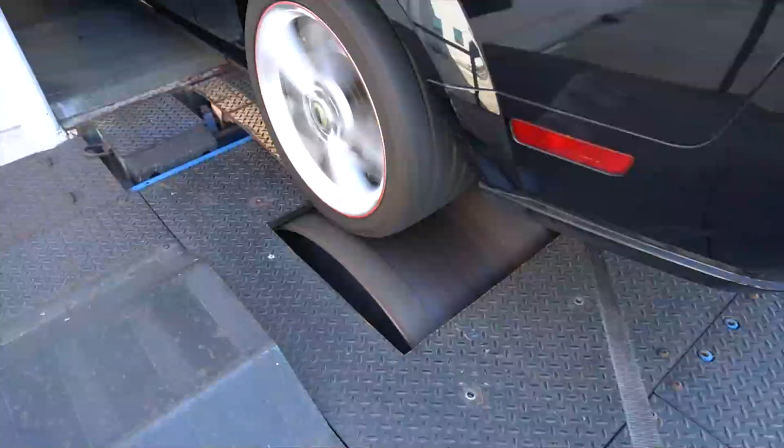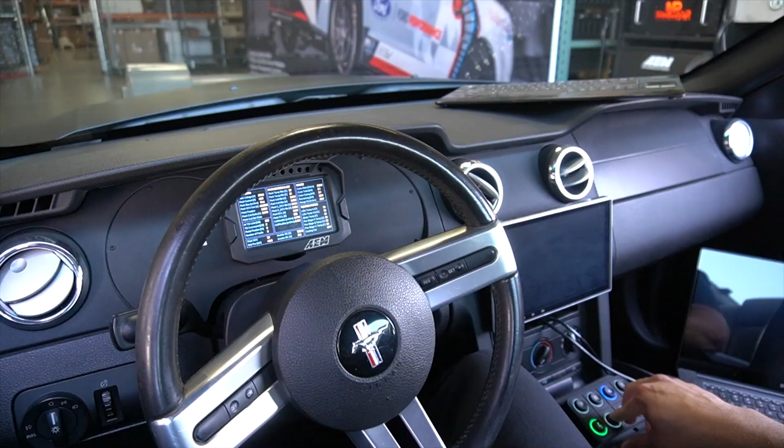All right, so we did our max power, all the beans, big number runs, and now just to demonstrate what the performance levels will do, we're gonna switch down to performance level 2. So I'm gonna hit that button. Performance level 1, all the beans, 460 Newton meters. And performance level 2, 400 Newton meters.

All right, now we're gonna go performance level 3, take it down another notch. Torque limit, 350 Newton meters.

So we get it ready for power level 4. This is grandma mode, no offense to any grandmas. Maybe we'll call it turtle mode, no offense to any turtles.

And that's about it. I'll tell you what, as a tuner, I really appreciate how clean and quiet being in this car is. I used to tune race cars and all kinds of stuff, and I would just stink like exhaust and get headaches and be nauseous all the time. EV tuning is like worlds better than old ICE tuning, I'll tell you that. And my ears appreciate it too, it's quite a bit quieter.

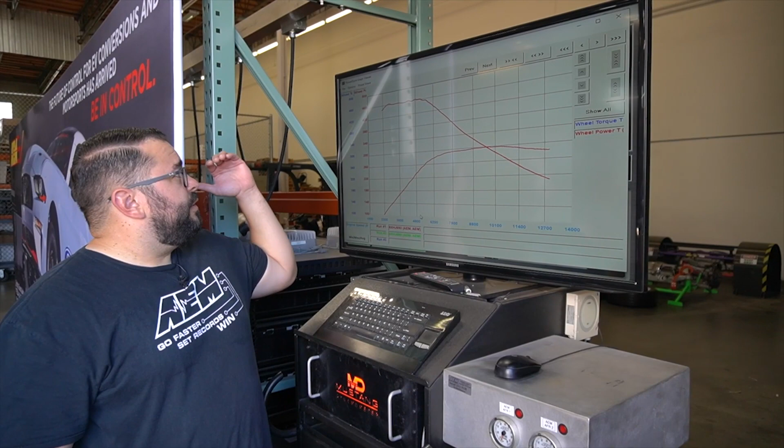The Tesla drive unit has a 9.73 to 1 reduction gear ratio, so almost a factor of 10. So we're making 460 Newton meters of torque at the rotor, times 10 is like 4,600 Newton meters of axle torque that you're measuring at the wheel.

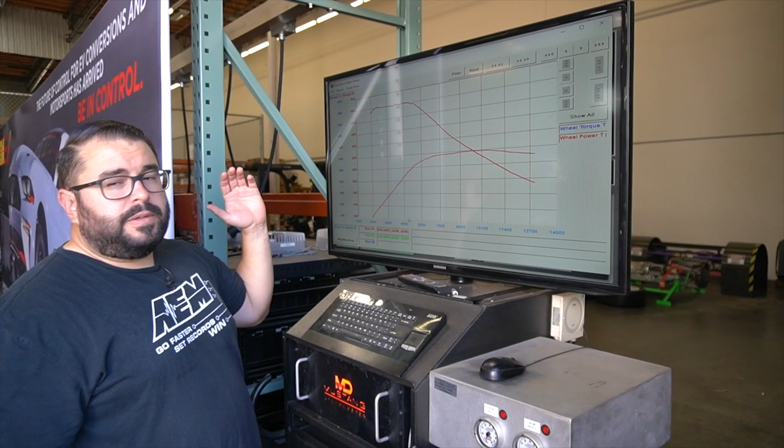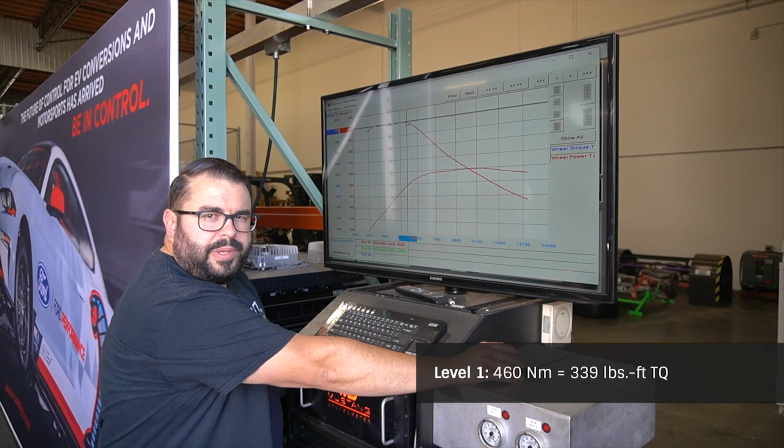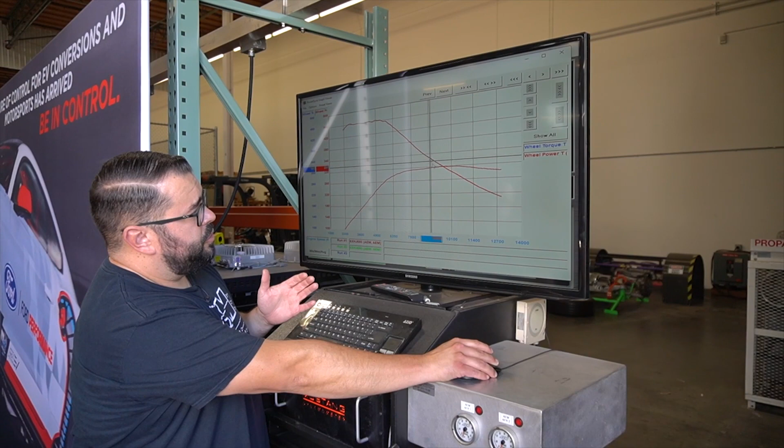All right, so performance level 1, max power, all the beans, foot to the floor, as fast as we can go. We're making a very consistent 460 Newton meters of torque out to about 5,500 RPM. At this point, this is called your field weakening point, so in order to maintain and make as much power as we can, we have to start dropping the torque curve off. So the torque curve is starting to decrease. Our power curve, we're making right at just a tad under 300 kilowatts of horsepower, plenty of go.

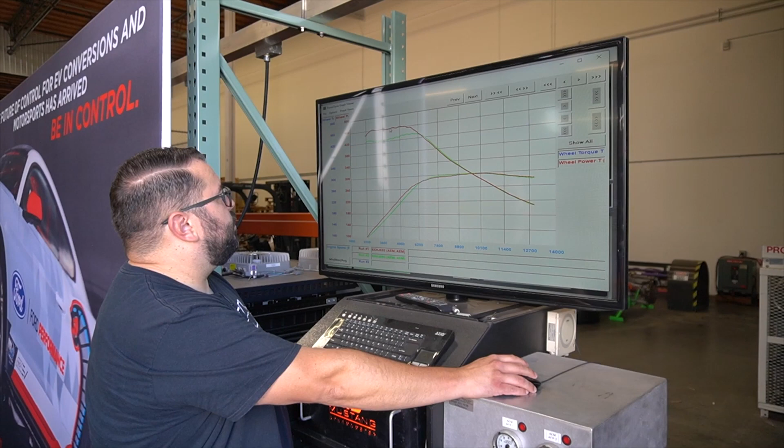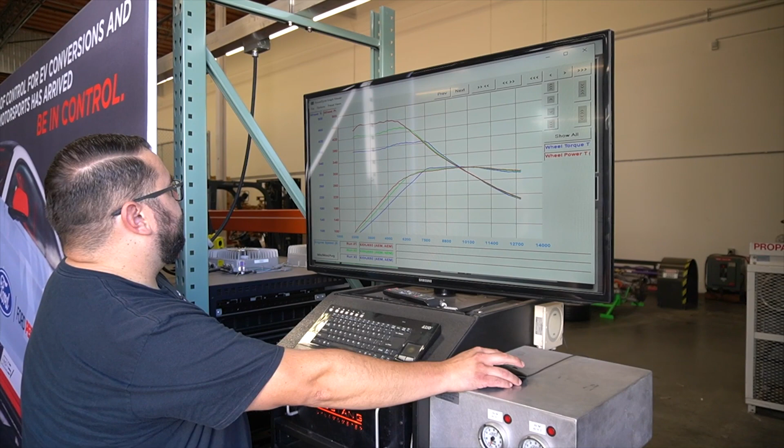So performance level 2, we're asking for 450, we get about 460, not bad. We're gonna drop it down about 50 Newton meters, not quite, 424, 425. It's nice when you get more than you ask for. Next performance level, we're gonna drop it down to 350, which is getting us more like 380, still not a bad problem to have. And then finally, our last performance level, down to 300, our valet mode.

And actually this is user configurable. You can tune it to however you want. You can do even bigger steps, go 100 Newton meter, 200, 300, 400, whatever you want. Point being, you've got the functionality and ability to do such a thing when a lot of other systems don't give you that capability whatsoever.

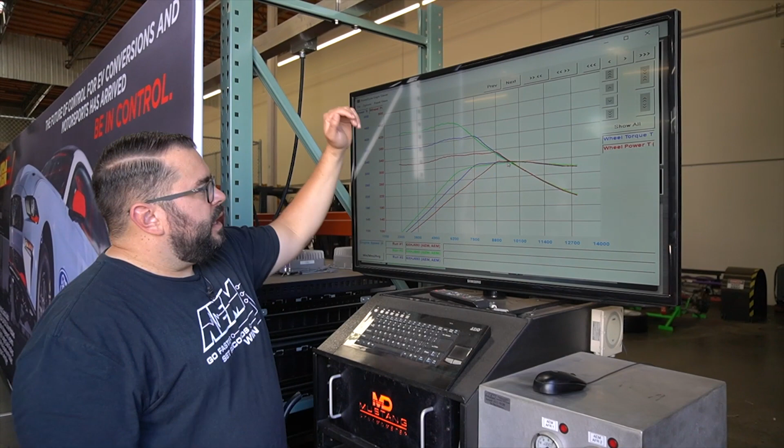So as Sound Guy just mentioned, he's looked at these torque curves and noticed that while the torque curves are actually decreasing, and they are, the peak power down here at about 9,000 RPM actually stays the same. So they all wind up making the same amount of power because of the way the electric motor trades off torque for power, they eventually cross at about 9,000. We might be decreasing our lower RPM torque and acceleration, but our peak power actually winds up being the same.

So kind of an interesting tidbit of information there. AEM EV would be totally remiss if we didn't really spell out the full truth and everything that goes into a performance electric motor and an inverter.

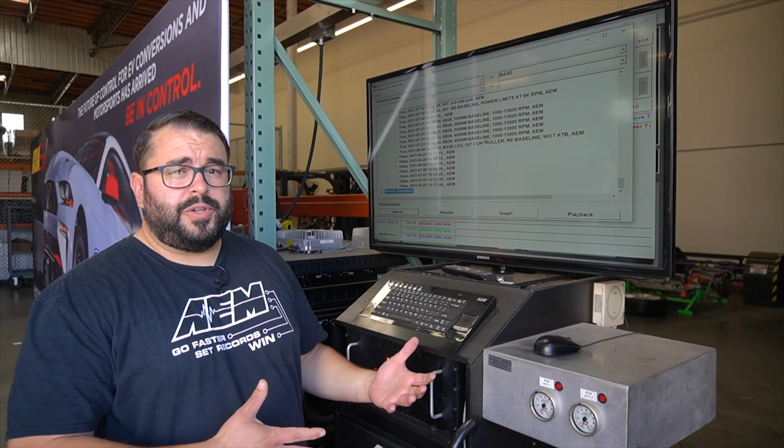So we've taken the time to strip out all the limitations and de-rates and things that make the Tesla drive unit limited in its performance. We've taken a lot away and we've fully unleashed it to its max possible power output, best we can do. That's one half of the equation.

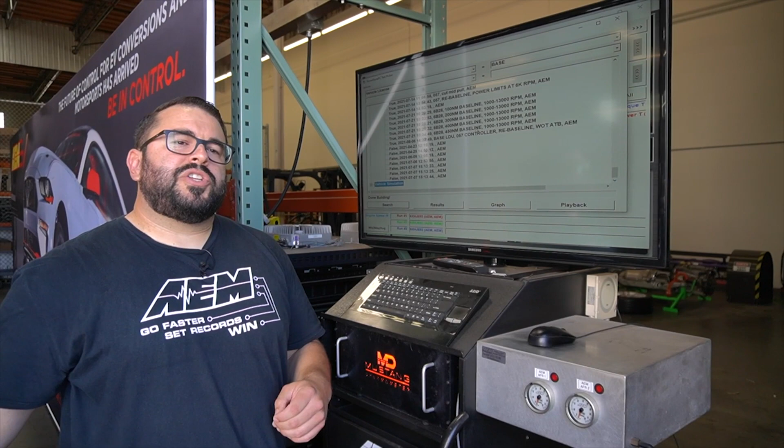The other half of the equation is the battery. When we run these motors and these drive units, you're not making a complete or fair comparison without at least acknowledging what kind of battery you're using. We touched briefly on the fact that the car actually has batteries out of a hybrid minivan. Another common battery that someone might choose to use is the battery out of a Model S itself.

The battery type in a full electric vehicle versus a hybrid, they're actually quite a bit different. The hybrid battery is designed to drop a lot of current, move a lot of current and a lot of power very quickly, whereas an electric vehicle battery is more designed to provide a steady, consistent power flow and not necessarily give you a big power punch. Our car has hybrid batteries.

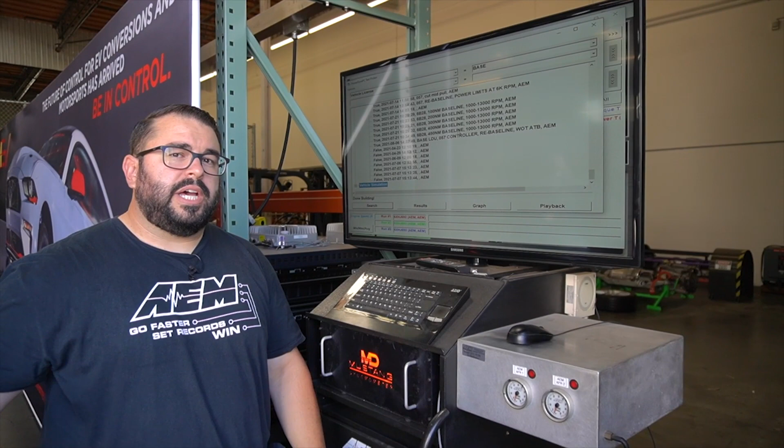They like to deliver a lot of current and a lot of power very quickly, so we are able to make a lot of power with our base drive unit. We've run a Model S P85 car on this dyno before. While you do get nearly 600 newton meters of torque, the torque curve very quickly drops off.

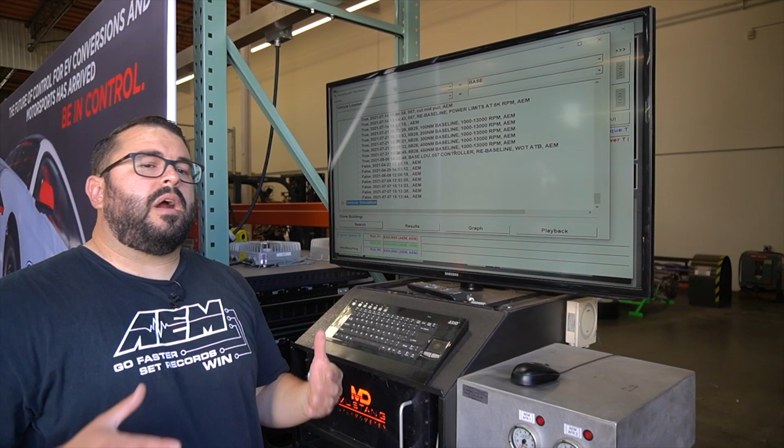The reason being is that the battery just doesn't have the power and performance to really push that power curve out as long and as far as it can. So what we discovered was that our base unit, combined with these hybrid batteries, actually makes more power than a Model S P85 Plus, which blows our minds. It's wild. But anyway, let's take a look at the numbers and show what that looks like.

So the blue curve is a Tesla Model S P85 Plus. You'll see that the torque curve peaks just under 600 newton meters, but pretty quickly starts dropping off. These other two torque curves here are from our base unit using the AEM EV inverter control board, and you'll notice they have two slightly different trends.

The first trace is our green trace, and that is our dyno development equipment that we have. Unfortunately we haven't been able to show it, it's kind of top secret stuff, so we've kept that stashed away. But with that drive unit and the power supply we supply to it on our dyno, we're able to make quite a bit of power. It really pushes the power curve and the field weakening point out quite a bit.

The red curve represents the car and what torque and power we're able to make with it and its battery. You'll notice we still make the same peak torque, that's all based on current. But what happens is as the battery starts to drop off in how much power it can supply, the field weakening point starts to happen a little sooner, and as the torque curve drops off, it's actually dropping below the torque curve of our base unit.

Our base unit with our hybrid batteries makes significantly more power. So while the Tesla will give you a good kick in the pants right off the line, all the fun from that torque curve is dropping off right away. It's just slowing down, slowing down, slowing down.

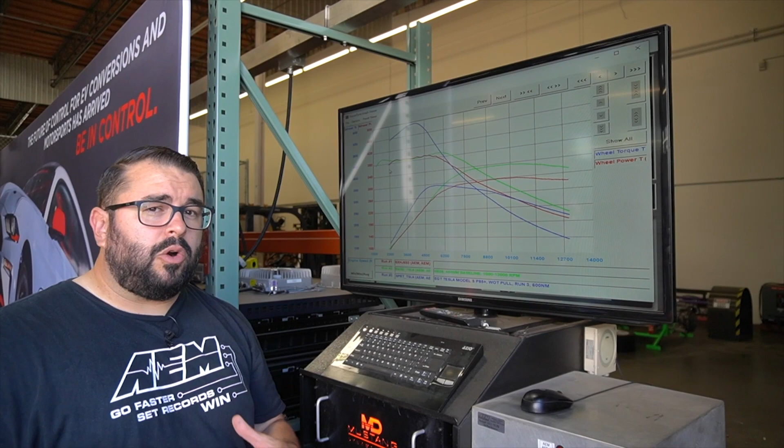What this tells you is that you're not quite limited in the drive unit itself. A lot of people push right towards a performance drive unit, but if you've got the battery behind it to really give it the current and power it needs, you get a shocking amount of power out of a base unit. As you're planning your EV build, take serious consideration into your battery.

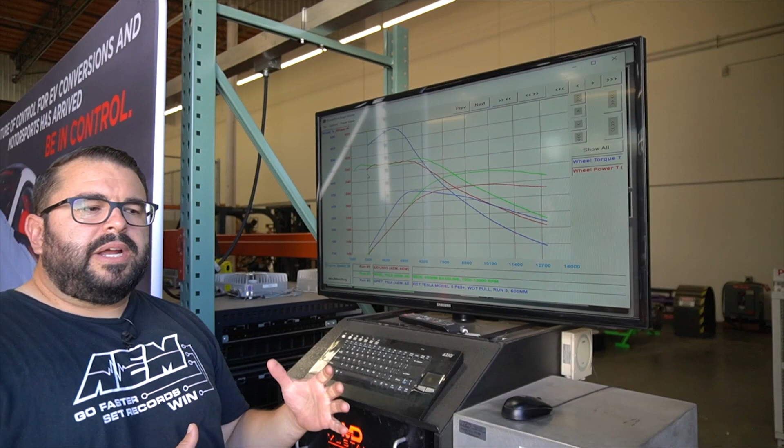Hybrid batteries work great, they're good at making a lot of power. EV batteries, depending on what your goals are—if something like longer life is more important to you, then perhaps an EV battery is in your future. We're a little more performance minded.

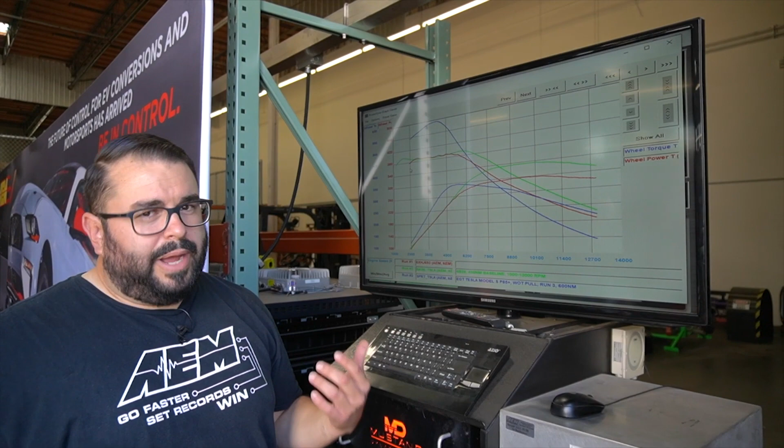We want to make that big number, so we go with hybrid batteries. Next step for us, we're going to get some more cars in here, put them on the dyno, see what kind of numbers they put down, and then the final step is to take them to the drag strip and run them down the quarter mile.

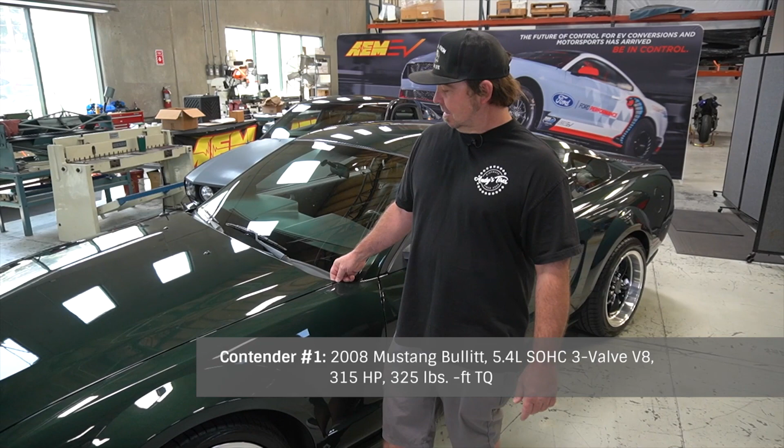Hey, how you doing? My name's Justin. I got a 2008 Ford Mustang Bullitt. It's got about 73,000 miles on it. Pretty much came from the factory just like this with 315 horsepower. Has a factory Ford Performance cold air intake, only came in the 5-speed. I've left it completely stock minus a recent muffler delete, and then I put some KW coilovers on it.

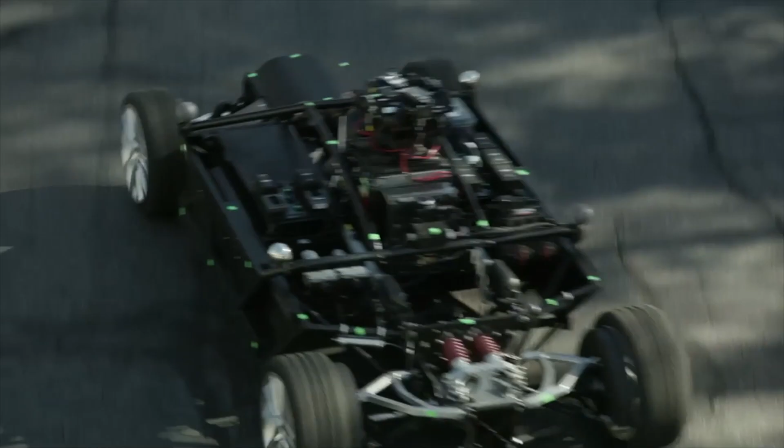I do have a little bit of a background with EV. I helped on the build of the Mill Blackbird, which is a CG car that they use in film production, mostly for commercials, where we can basically make the car any car we want just by changing the wheels, setting the wheelbase, setting the track width, and then they CG a body onto it, and it's an EV car. Oh, it's gonna most likely get its ass kicked.

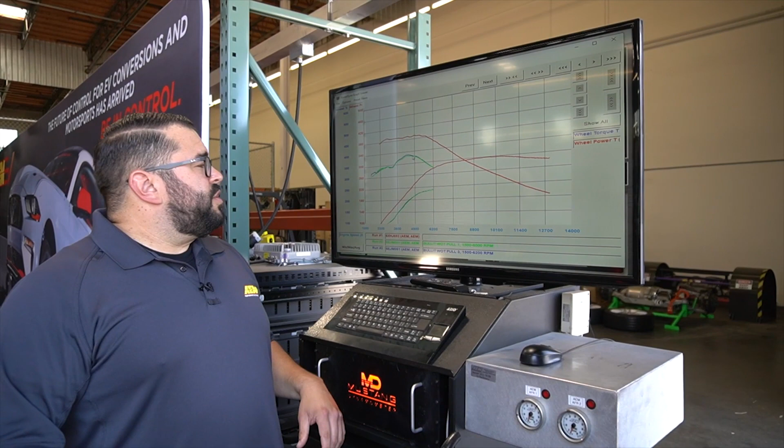We've run the Mustang GT, the Bullitt car on the dyno. The first thing you'll notice in the dyno plots is that the RPM range for the Mustang is from about 1,500 RPM to a little over 6,000 RPM. At that point, you got to shift into the next higher gear and keep going. With the Tesla, it'll run up to nearly 18,000 RPM. So our range is quite a bit larger. So there's no shifts that have to occur.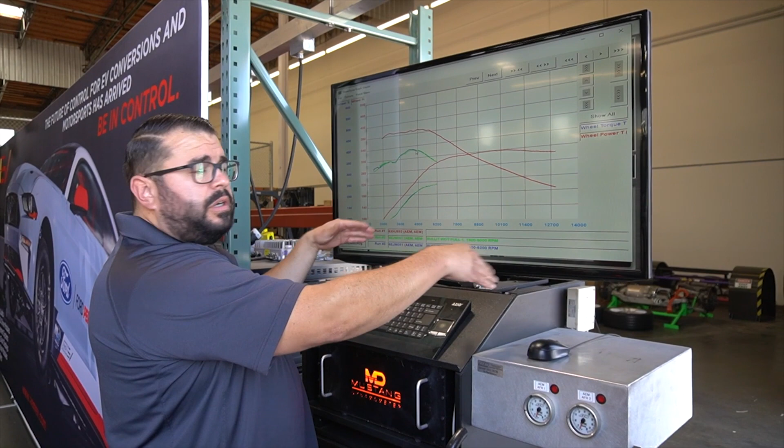There's no upshifting, no clutch, no delays between gear shifts. It's all just right there, right away, pedal down and go. The power pulls on something like a Tesla will go from basically stopped all the way to well over 100 plus miles an hour. We ran it maybe up to like 75 miles an hour in third gear. So we're able to measure the power in each gear independently. So we didn't have to run it in fourth gear direct drive. We can run it in actually any gear, synchronize the speed and run it in that particular gear, which works out really well.

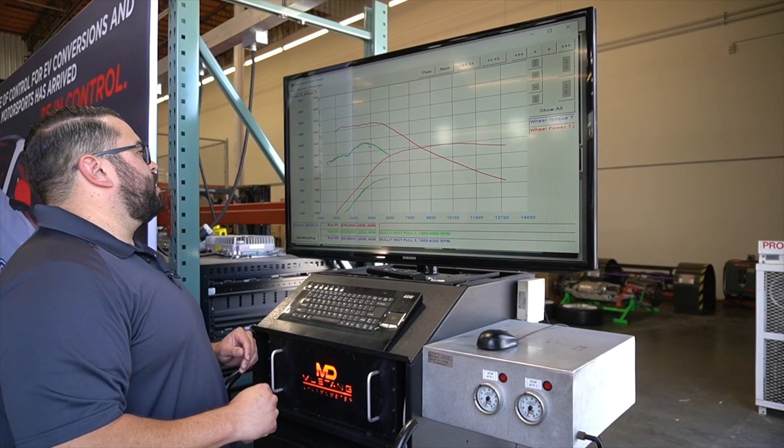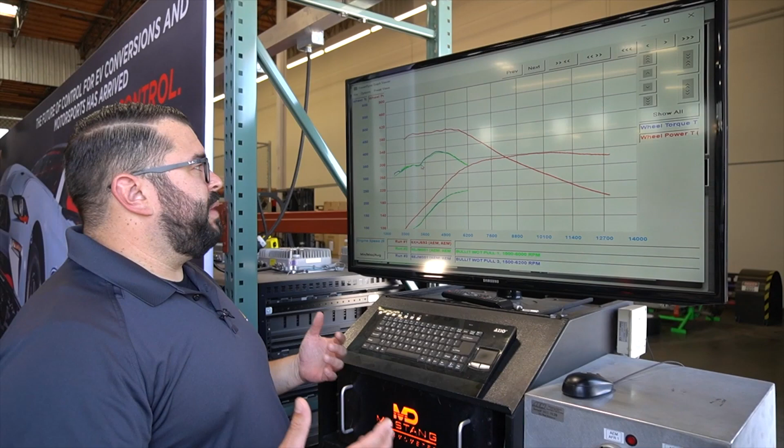Let's get down to the nitty gritty and actually talk about some of the number details here. This particular motor is what's called the mod motor 4.6 3-valve, and the 3-valve has the benefit of having a single overhead cam that actually is variable, and you can see where that variable cam kicks in, and you can see that in the torque curve.

Down here we're making let's say 330-ish Newton meters of torque, and then it looks like the cams probably start to do their thing, and it makes a peak of about 385 Newton meters. That's pretty good, that's not bad at all. And that carries out and drops off to about 325 once we get to the red line of about 6,200 RPM. Now, as far as what that equates to in power, we're making just a little over 210 kilowatts, 209, 210 kilowatts. Pretty good, considering the motor is rated for 315, figuring in about a 15% drivetrain loss. These numbers totally make sense for what they are.

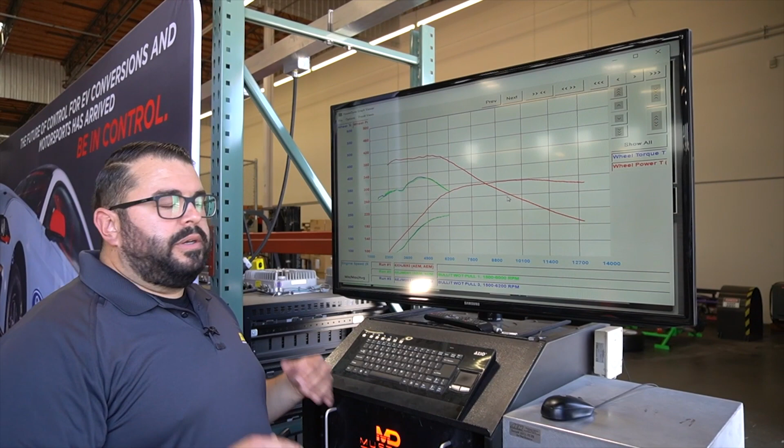Now, the thing to compare really is just the stark comparison between the power level you get with the internal combustion engine and then what you would get with something like the Tesla. Another 100 kilowatts basically of power, and I think every 100 kilowatts is 1.3, so about another 135 horsepower. The performance on an EV, on something like a Tesla large drive unit is bar none. Gear reduction ratios you get, the torque output, I mean, it's a big honking motor and a big drive unit that just makes a ton of torque and has a single gear that revs all the way to almost 18,000 RPM. So it's just, there's no comparison. They're night and day different, and you can see that in the dyno plot.

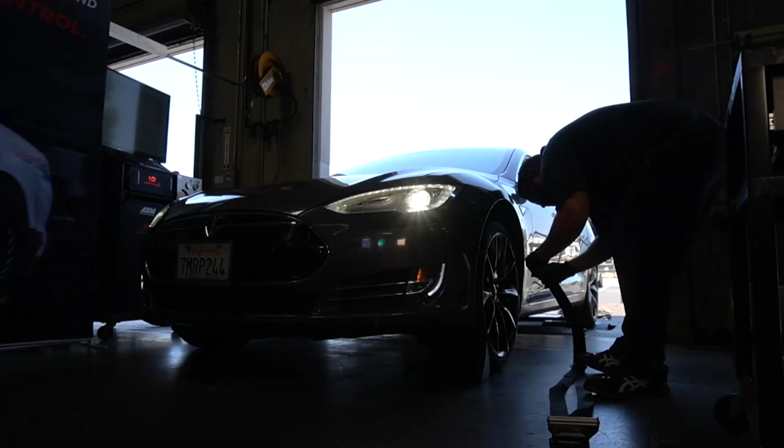The next car up that we're gonna run is actually, we're gonna pit the Tesla powered, Tesla battery, Tesla Sport drive unit from a Model S P car to our Mustang. We've just finished running the Model S P85 Plus car, and this has got rear-wheel drive, two-wheel drive only, large drive unit, sport version, the performance version. Right off the bat, let's look at the torque curve. So large drive unit has been published to make about 600 Newton meters of rotor torque.

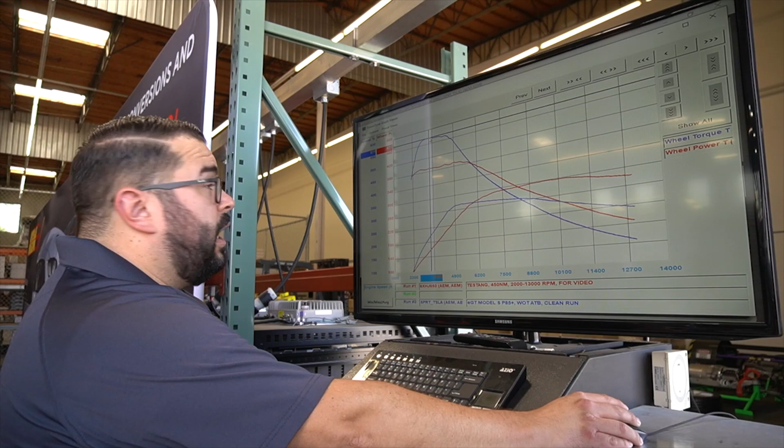We'll be generous and give it the peak. It made about 570, 571 newton meters of torque. That's great, that's really good. And actually driving this car around, it throws you into the seat.

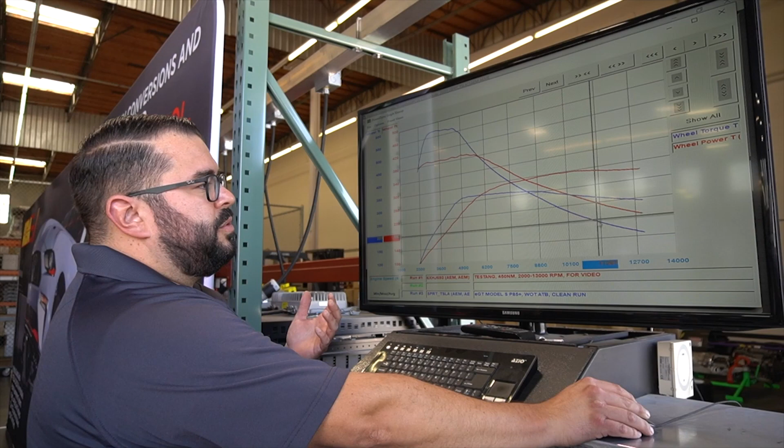It really is instantaneous, it's awesome. But the thing we want to see, granted it does make 550, 570 plus newton meters of torque, you can't ignore the trend, the actual torque characteristic, that it pretty quickly starts to drop off. You get that really first quick acceleration, and then you feel the fun starting to end, it doesn't pull as hard as long. So the torque curve drops off and continues to drop off, and what that's really indicative of is the battery chemistry. You do get the kick in the pants right off the bat, that's great, but the bottleneck, the limit here, is actually the battery itself. It's not able to push out the power and current that the motor really needs to continue making as much power as possible.

So that was the torque curve. Let's look at the power curve. And here we can start to compare it to the power curve from the Testang. Because the sport unit is making more torque, the upward trend of the power curve is greater than the one on the Testang with the base LDU. So it's making more power, making it a little sooner, because it's making so much more torque. It's making like 150 newton meters more torque, which is very significant.

But because the torque curve is starting to fall off, the power curve peaks, probably about 40 miles an hour like I was saying before, and it pretty well flatlines and then starts to drop off as the motor speed continues to increase.

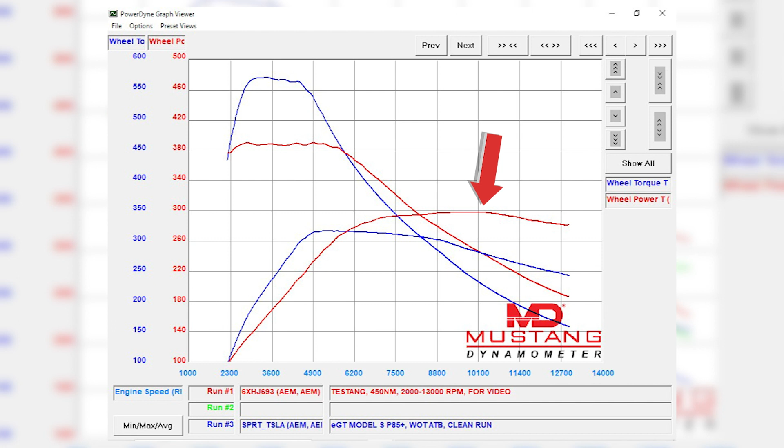So the thing to really take away from this, let's look at the power curve from the Testang with our base LDU and the AEM EV control board. Granted, our rate of power isn't as significant or as high as it is in the sport unit, but notice that it keeps going and finally peaks right at 300 kilowatts. According to our dyno, this Tesla Model S P85 Plus made about 275 kilowatts of power. We're making 25 kilowatts more power with the base large drive unit in our Testang.

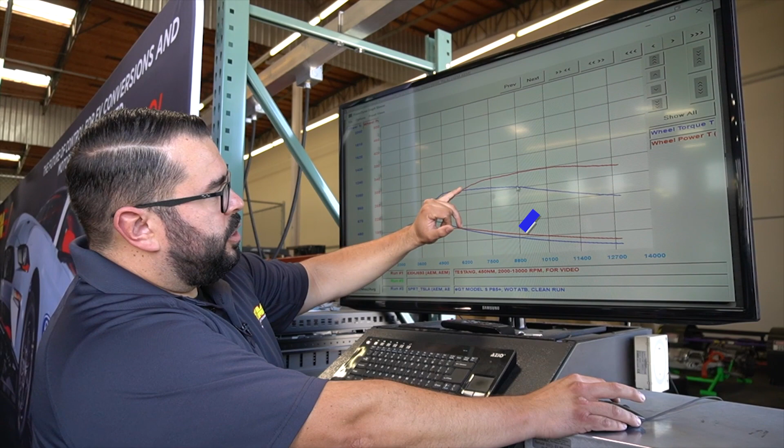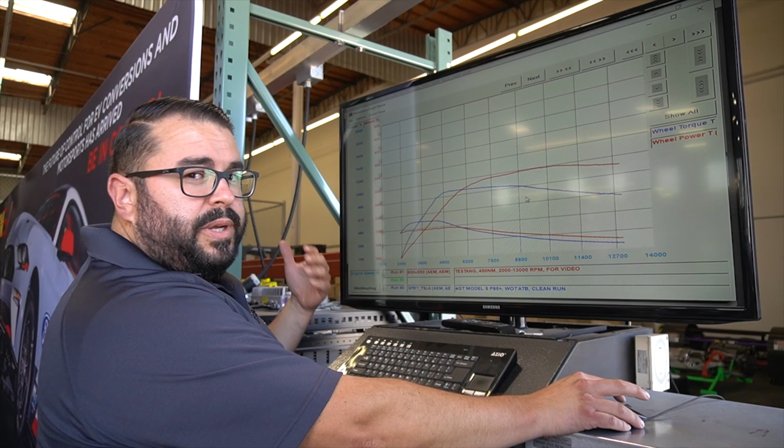That's pretty cool. And the meat and potatoes of that power curve is right here. You can see that the Tesla torque curve is trending down, and the Testang with our AEM EV control board is not trending down nearly as much as the Tesla curve. So this is torque that's continually being delivered at a higher rate as the motor continues to accelerate. The power curve is not dropping off, the car is not slowing down, the car is accelerating.

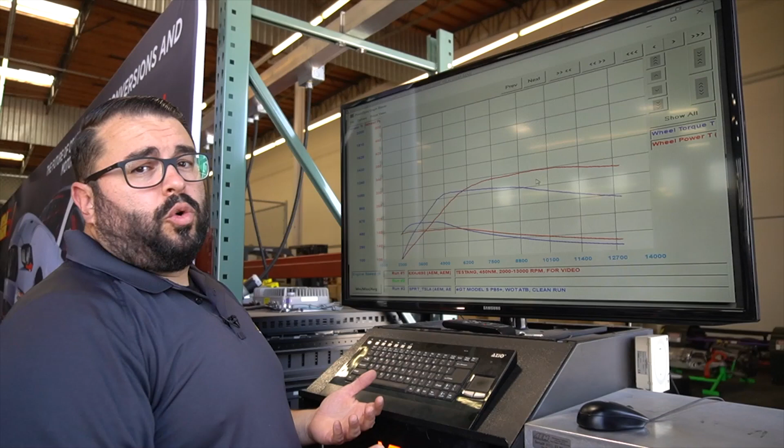You're going to see these results very dramatically, I think, in the quarter mile. My expectation is the car will probably get us in the first, I don't know, couple hundred feet. And then where this power curve continues to increase past the Tesla's power curve, the Testang is probably going to start catching up and possibly walk away from the Model S in the quarter mile.

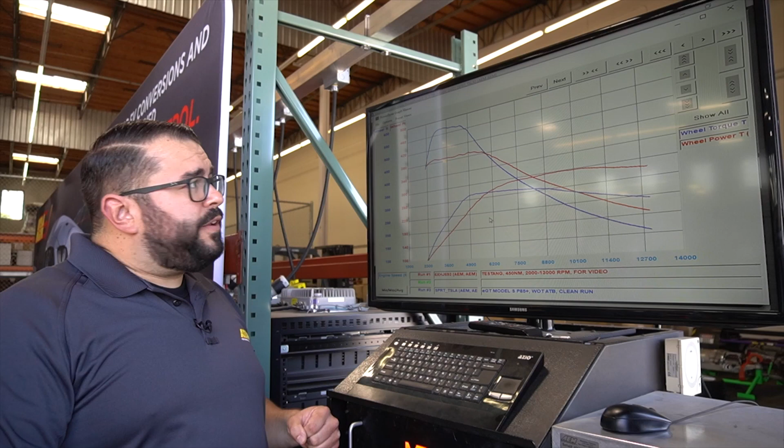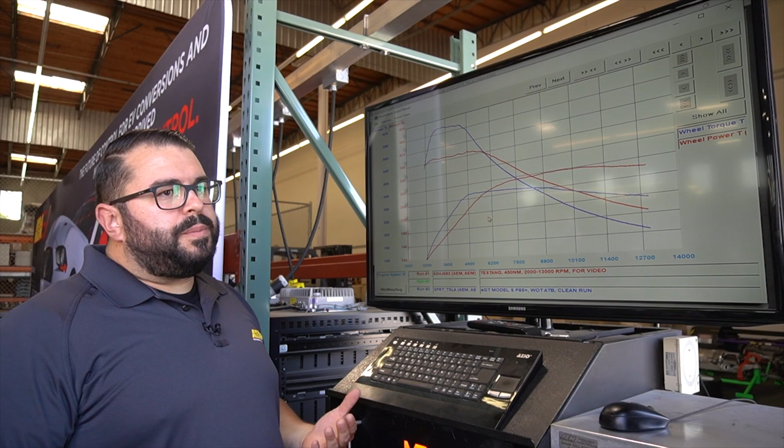If you're out there doing research and looking around, wondering what kind of battery you should pick, this data really does point you towards something like a hybrid battery, whereas something like a full electric battery serves a purpose that may not necessarily be as well suited for maximum performance.

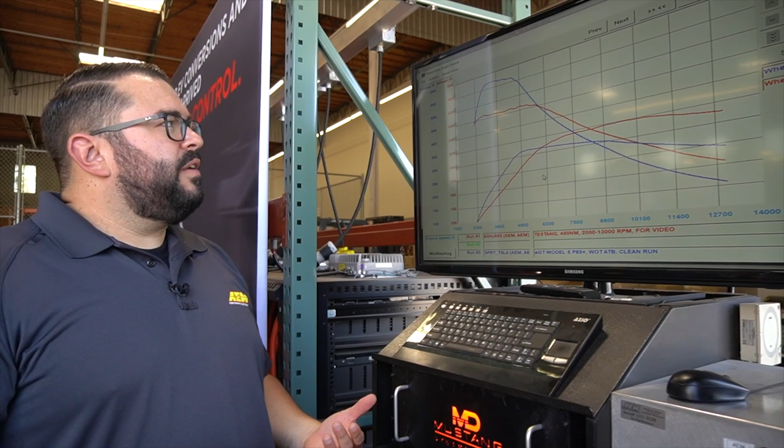So we know that best case scenario, our control board on a base drive unit makes 50 to 55 more newton meters of torque than a stock setup does. Stock Tesla is probably going to be down here at the 400 mark, and if we project that out, I'm assuming it's going to follow the same trend and start falling off, mirroring the P85 power curve or torque curve. It's going to be somewhere down underneath here, quite a bit less power, probably under 250 kilowatts. If it makes more than 250, I'll be surprised.

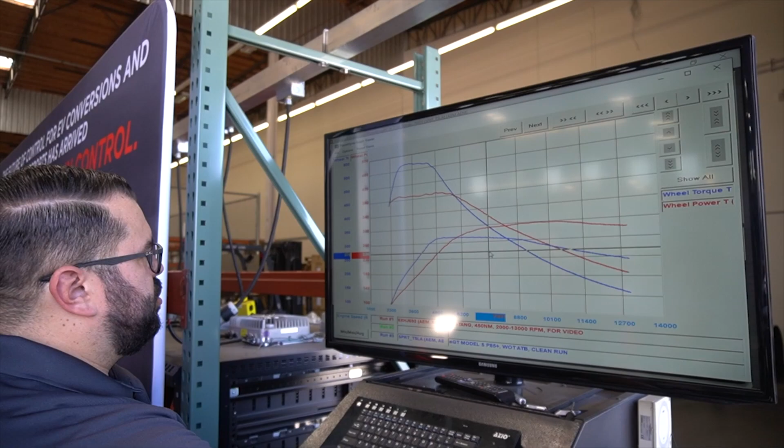So when we did all of the base LDU development, what we tested and did development on was actually a stripped down drive unit mounted in a Tesla subframe, with the drivetrain, suspension, axles, wheels, hubs, everything. That whole assembly minus a car, we made a rig for and bolted it to our dyno, and that's where we did well over 1,000 runs to collect data and characterize and tune the motor. A lot of this base data we have was from that test unit.

The one thing we haven't done is actually test a true, real, from-the-factory base Model S drive unit. It's exactly what we've been testing all along, but we're going to leave it paired with its stock Tesla battery. We want to do a true apples to apples comparison. That's what we're doing today.

We're going to lay down these numbers, do a quick analysis, and do a final comparison to really show the difference between these drive units with our control, stock control, as well as how important the battery really is in what kind of power you get out of your drive unit. Let's do some pulls and see what kind of numbers we get.

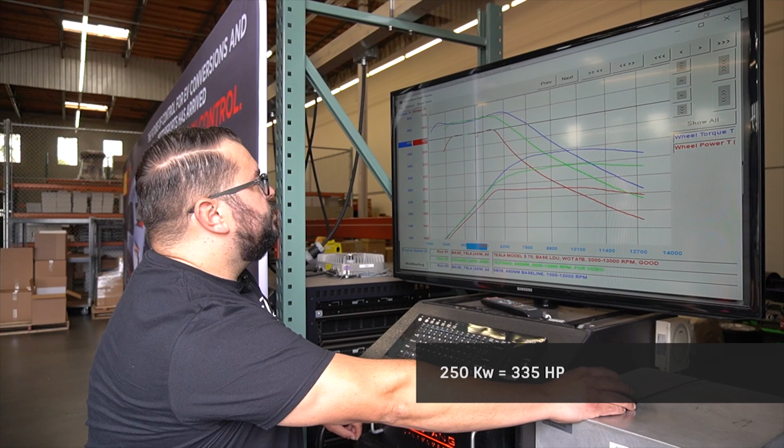So now that we're looking at the data, I said we're going to make 250, and it turns out that peak power, this red trace here on the base unit on this car, made 247 kilowatts. Right around that 250 mark. 420 newton meters of torque. We've seen that before, that's pretty standard. And just like we saw in the P85 car, it makes that torque, but it can only make it for so long, before the battery power and its voltage really starts to drop off.

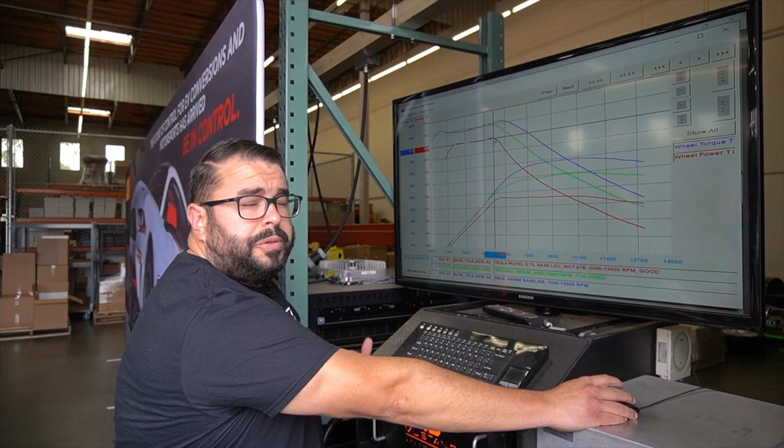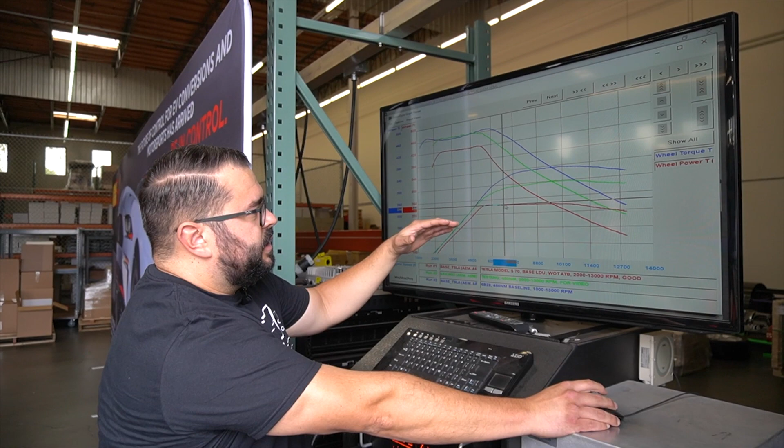Thus, when that happens, you see the torque curve starts dropping off, and that correlates into the power curve coming up, broadening out at about 250 kilowatts, staying relatively flat, then eventually tapering off at high RPM. So the next step up from this, let's talk about getting into the AEM control board.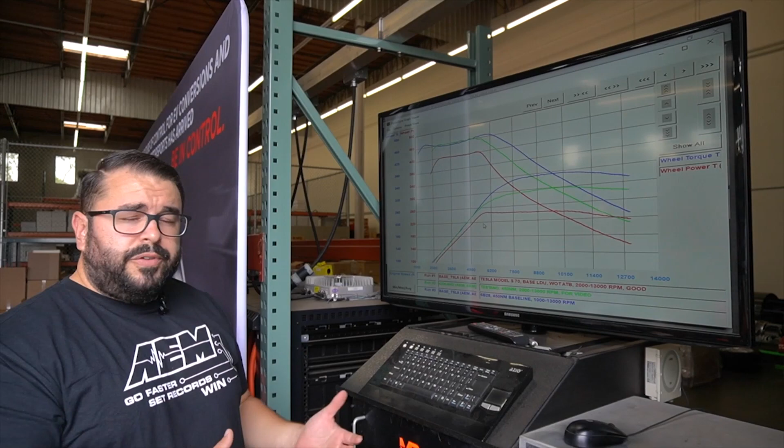Okay, we put that into the drive unit, and now the drive unit is completely unleashed. Comparing to the next combination, the base drive unit with the AEM control board and the hybrid batteries in our Testang, we've got our green trace. Looking at the green trace, in this particular setup, we're making about plus 40 newton meters of torque.

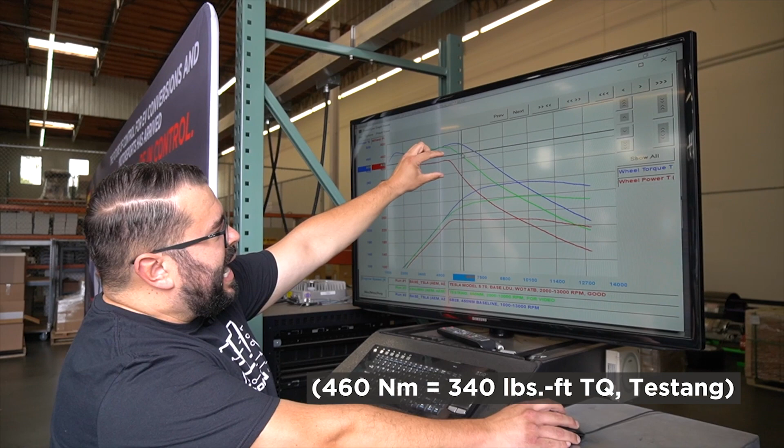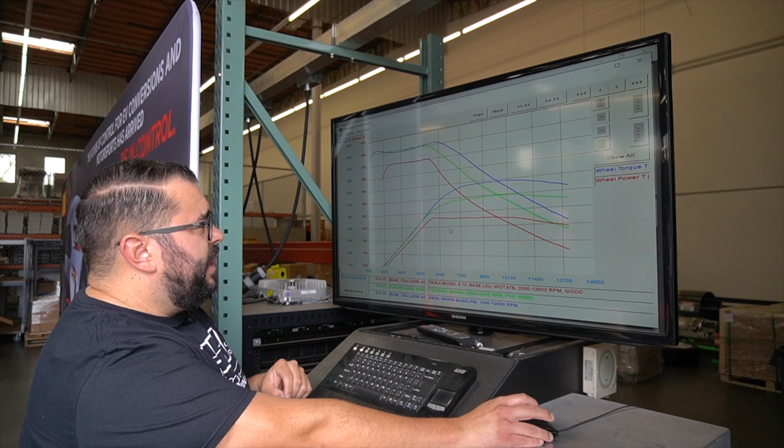And if you look at it, we carry this gap. We basically mirror the torque curve from factory, bump it up, and carry that gap all the way through to real high RPM. What that translates into in the power curve is it sweeps up and then more gradually lays over, and we're making plus 50 kilowatts more power. We're making about 300 kilowatts, when the base unit peaked at about 250 kilowatts. So plus 50 kilowatts of power. That's a pretty substantial power increase.

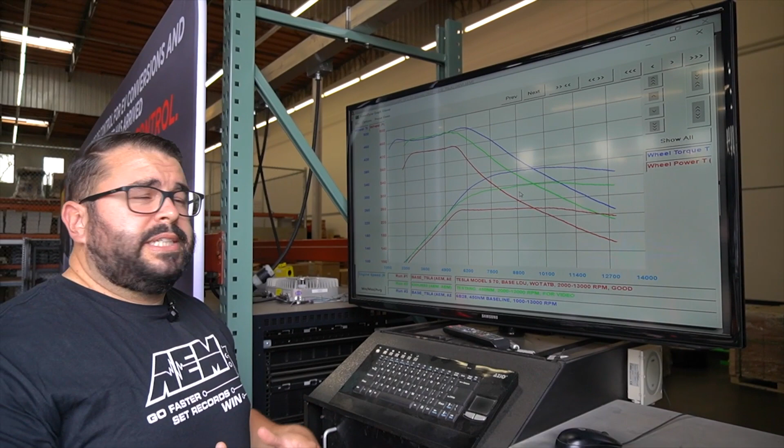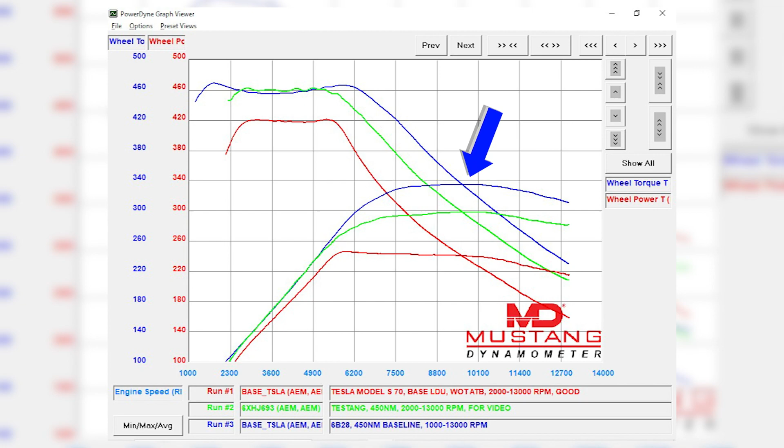So that's what the Testang gives you. When you've got a good battery with good current and power capacity that can dump a lot of current quickly, those power cells, we're going to put them to good use. We're able to make 300 kilowatts with the Testang, and bump that up to like 335-ish kilowatts when we've got our Dyno battery stack, our big power supply for the Dyno.

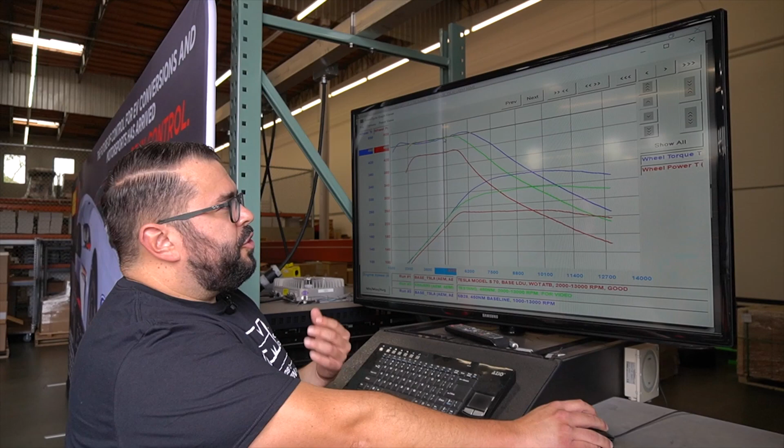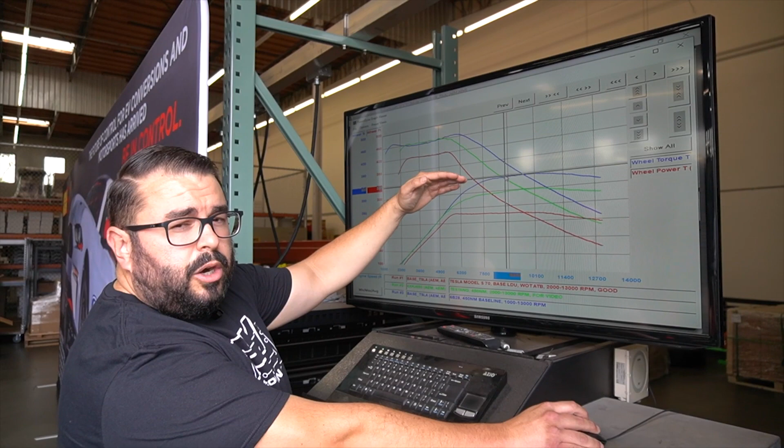And the reason we're making that additional power is basically this: we're not making any additional torque. The torque is based on current. What we're able to do is actually keep making that torque longer. By pushing out the torque curve and not dropping it off until a higher RPM, that results in a higher power curve. Compared to the Tesla, the gain is huge.

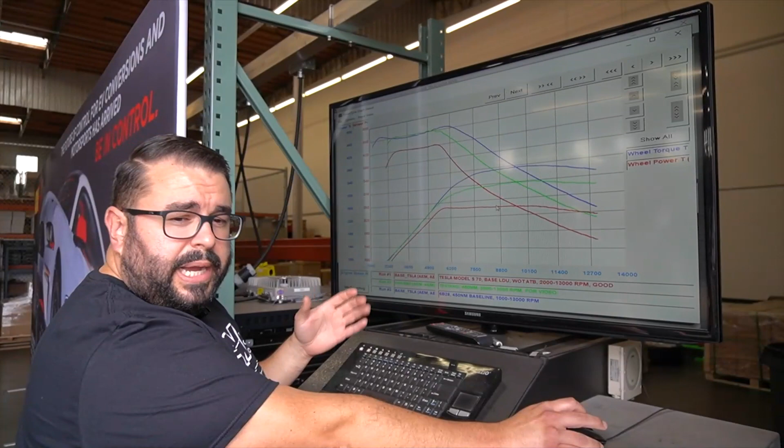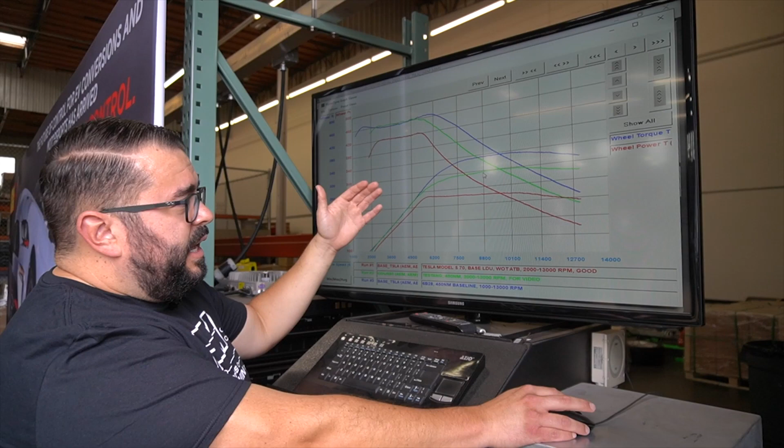It's almost 90, almost another 100 kilowatts going from something like the Tesla package with the Tesla battery to best case scenario. If you had a really badass battery that could do a lot of power and a lot of current, you could technically hit this. Stock's not bad. There's the AEM, AEM is better, and the AEM with the best battery you can imagine is better yet.

All right, so the next step for us, we're done on the dyno. We're gonna get everything gathered up, head up to Bakersfield, hit the quarter mile. Stay tuned, and we'll see how we do.